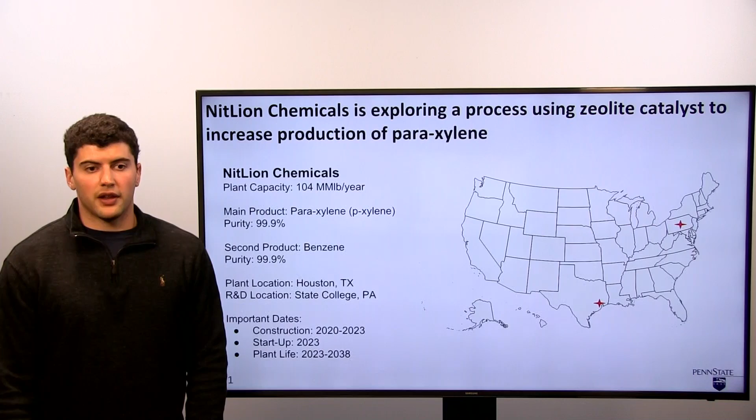The plant life has some important dates to note. Construction will begin in 2020 and last until 2023, with startup occurring in 2023 as well. The total plant life will be 15 years and will end in 2038.

Our process design had to meet a few specification goals in order to be considered successful. For example, p-xylene product purity needed to be 99.9%, benzene product purity the same, and toluene product purity must be 99.5% if we were to sell toluene.

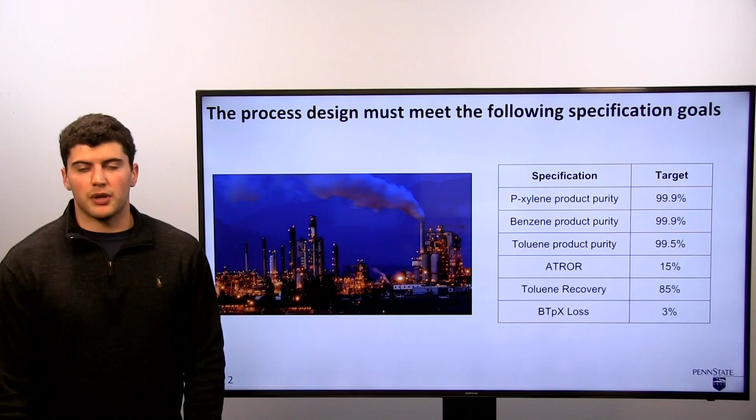Our after-tax rate of return would have to be 15% to be considered a successful plant, while our toluene recovery after the reactor would have to be 85% through the separations. And finally, our benzene, toluene, and paraxylene loss needed to be less than 3% to be considered successful in the eyes of NitLion Chemicals.

Our presentation will focus on three main points. The first is our process design and our equipment design, where we talk about how we went through the process flow and how we designed our equipment to meet the specifications needed.

The second is an economic evaluation with a sensitivity analysis to determine the feasibility economically of our product and our plant in total. And finally, we'll make some recommendations and future work recommendations in order to produce the p-xylene that we need with a feasible outcome.

The process operates in two main phases, synthesis and purification. For our first phase of synthesis, we covered just our reactor, and within our reactor is our main phase, toluene disproportionation, followed by two side reactions: toluene hydrodealkylation and xylene disproportionation.

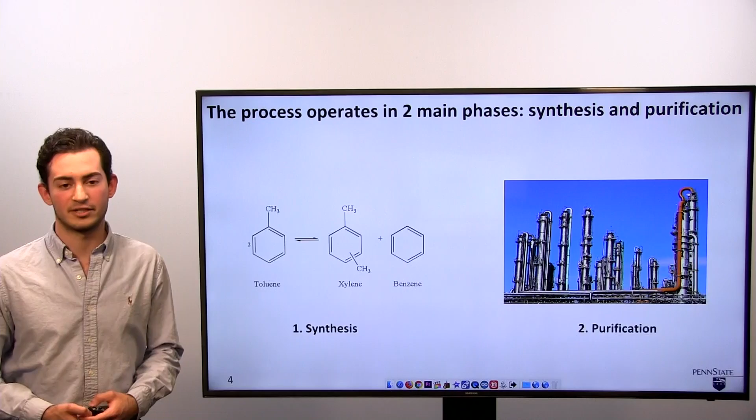Moving on to our second phase, we have our purification, which covers a VLE separator, 3 distillation columns, and a Parex. As you can see, this is our BFD, which we'll expand in just a few seconds.

We have our toluene feedstock combined with our hydrogen feedstock to go into the reactor. From there, we have our products, which will then go into the VLE separator. With the VLE separator, we hope to separate our light gases from the rest of the feed so that we can have better distillation products from our distillation columns.

For our first distillation column, we have benzene leaving the top of the column as a distillate, and it's also equipped as a partial condenser, so we can then vent the light gases out from the top as well, so just in case if we have any residual hydrogen or methane, it can leave our process.

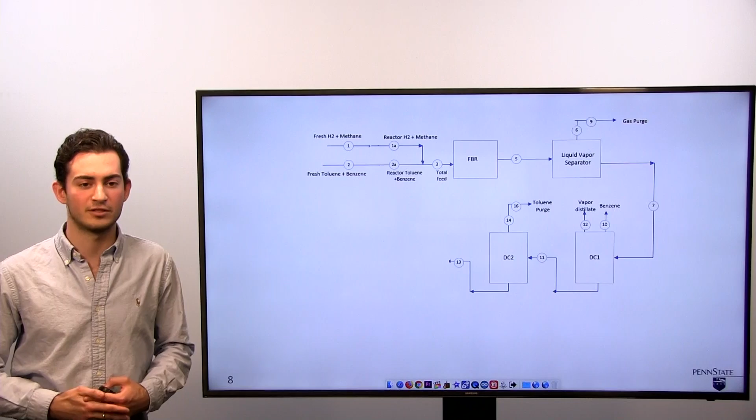That's followed into our toluene distillation column, where we are able to remove 99.9% of our toluene, and then our TMB column, which removes all TMB. That allows us to have an enriched feed into our Parex, where we can then have our purified product.

The reactor utilizes zeolite, a new catalyst, to convert toluene to mixed xylene isomers with high selectivity to p-xylene. What we saw with traditional catalysts is a selectivity of 24% to p-xylene, while our reactor is actually capable of achieving 34%. That is why we decided to use zeolite as a new catalyst.

Our reactor contains 13,000 pounds of catalyst and has a length of 14 feet and a diameter of 5 feet. We have our hydrogen feed combining with our toluene feed in order to reduce coking within the reactor. Then we have our products, which are the mixed xylenes, benzene, TMB, which comes from a side reaction, toluene, hydrogen, and methane, which also comes from a side reaction.

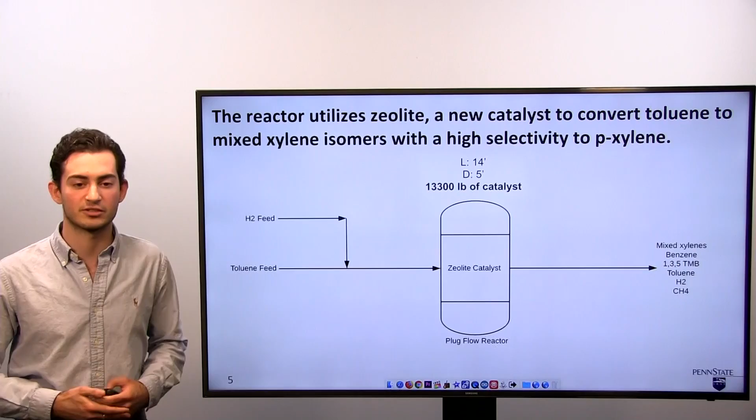Distillation separates the benzene, toluene, and TMB from mixed xylene isomers. The benzene column is equipped with a partial condenser, which removes any residual hydrogen and methane from the process stream. That's followed by the toluene column and then the TMB column. All three columns are under 200 feet, and they also have a diameter of roughly about 10.

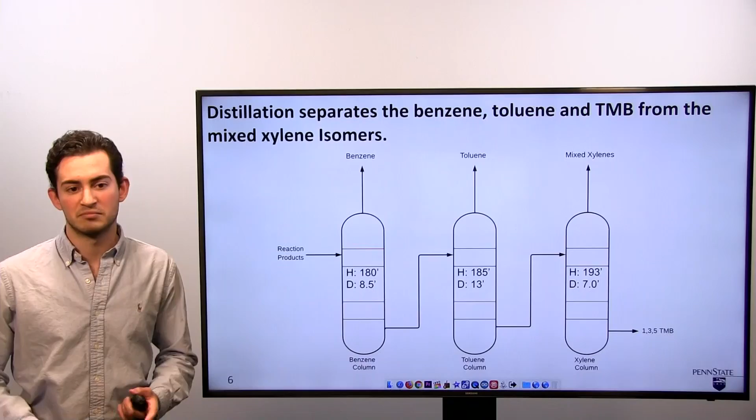The P-xylene is then separated from the O and M xylene isomers using the Parex adsorption unit. The conditions were set by NitLion Chemical at 320 Fahrenheit and 95 psia, in order for the column to work correctly and achieve the correct separation.

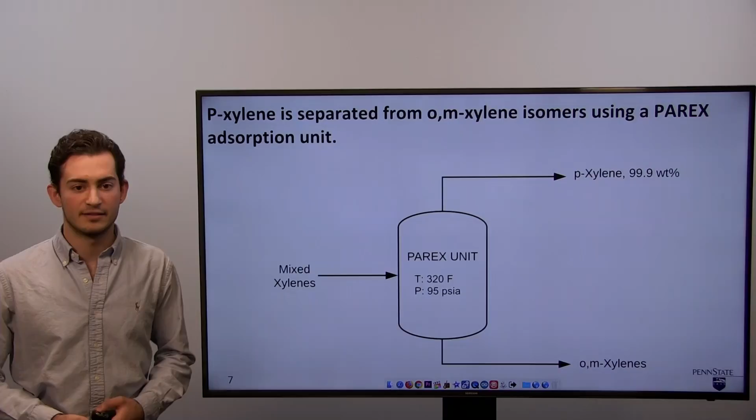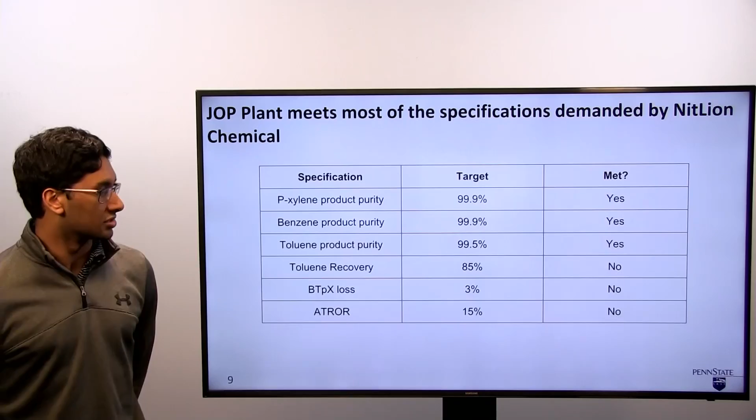The plant uses three types of control schemes to maintain proper process operation: temperature control, level control, and pressure control. The temperature control is used to maintain the temperature of the process stream exiting the heat exchanger, and it varies the flow rate of the utility.

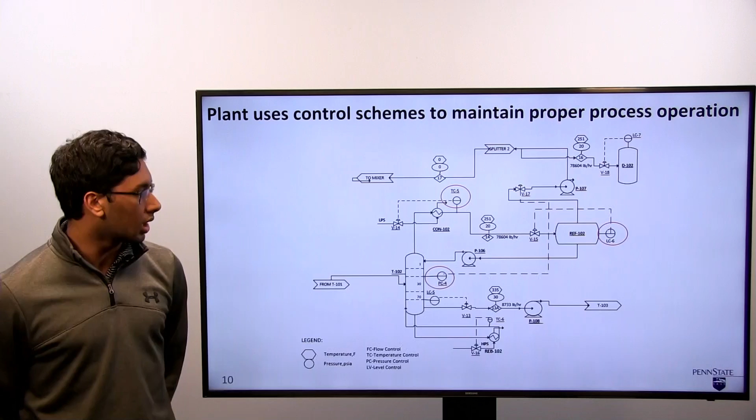The level control maintains the liquid level in the tank. If the liquid level is too high, then the rest of the plant downstream of it will be backlogged. The pressure control maintains the pressure in the column, because if the pressure is too high, that could cause explosions within the column.

In addition to meeting the product purity specs, the plant also meets the safety specifications required by NitLion Chemical. The first one is the benzene safety specification, where the storage tank for benzene is kept far away from a natural river source, which prevents contamination.

The second specification is the hydrogen and methane gas purge. It's kept away from an open flame or anything explosive to prevent explosions. The third one is the TMB flare, which converts TMB into CO2 and hydrogen into water vapor. The ppm of CO2 leaving the flare is kept under 40 ppm.

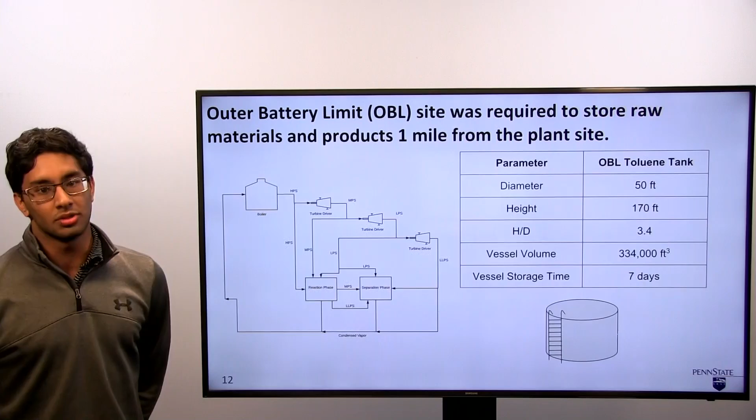There's an OBL site used to store raw materials and products 1 mile from the plant. On the left-hand side of the screen, you can see our steam generation OBL site. We use high-pressure steam, medium-pressure steam, and low-pressure steam to supply utilities to our plant. On the right-hand side is the dimensions of our OBL toluene tank, which has a volume of 334,000 cubic feet, and the storage time is 7 days.

After we analyzed the design of our plant, we looked at the economic viability of building this plant and whether it would turn a profit. Our plant capital is estimated at $165 million, and that includes our IBL and OBL costs.

Currently at market price, we can sell our P-xylene and benzene products for a total of 84.6 cents per pound, and we are also making a net gain of 8.62 cents per pound by selling our steam as well as our TMB as fuel.

We also took a closer look at our IBL capital costs, and we found that the Parex unit takes up a vast majority of this cost at $56 million of our $92 million estimation. So this is the most expensive piece of equipment that we will have to install.

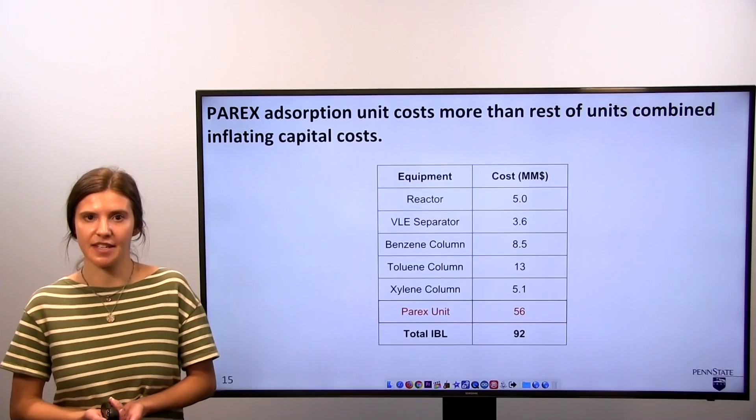In order to be profitable, we need to take a closer look at our raw material costs. We found that 85.2% of our cost is our toluene feed, which comes out to about $2 of toluene per pound of product we make. Since we're selling our product at 84.6 cents per pound, this is not viable.

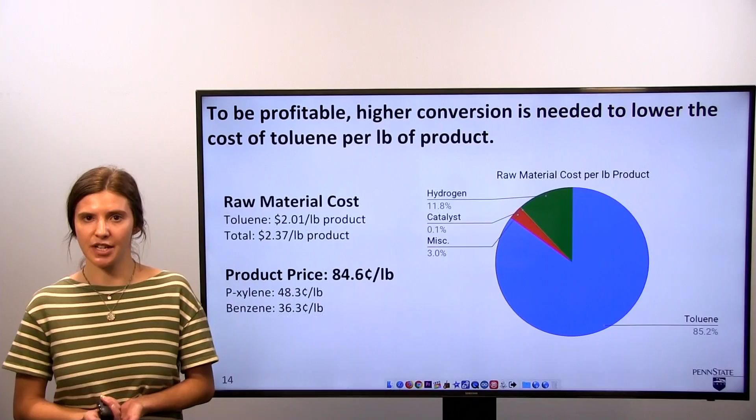So in order to decrease the amount of toluene that we use per pound, we need to make a higher conversion of our product and make more P-xylene.

Finally, we looked at the cash flow, and we found it to become increasingly negative for each year of operation. Our net present value over 12 years was negative $846 million, which is a very large amount. We want to be making money and not losing money.

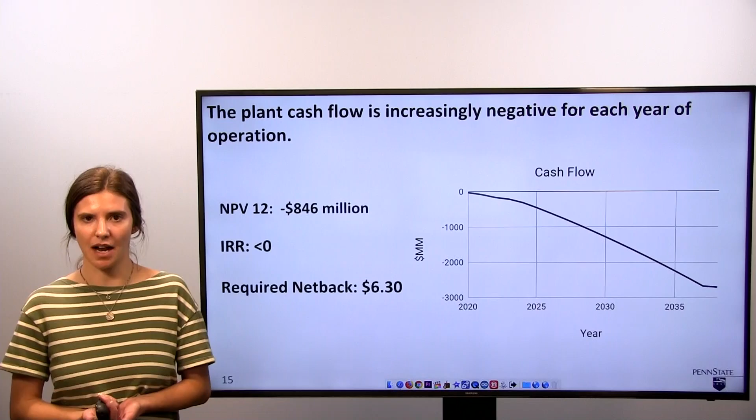We didn't have an internal rate of return, so we did not meet our 15% ATROR as specified by NitLion Chemical. In order to meet 15%, we would have to be selling our product at $6.30, which is much higher than market value today.

The third option is by varying the price of raw material, which is toluene. From the graph, if we increase the price of toluene, the cash flow will decrease. Again, this option is not feasible, as the price of toluene might increase in the future.

The fourth one is by delaying the start-up year. Delaying the start-up year until 2027 will increase the cash flow. However, after 2027, the cash flow will decrease. So it can be concluded that this option is not feasible. All these four studies have been conducted at the current product price, which is around 84 cents per pound.

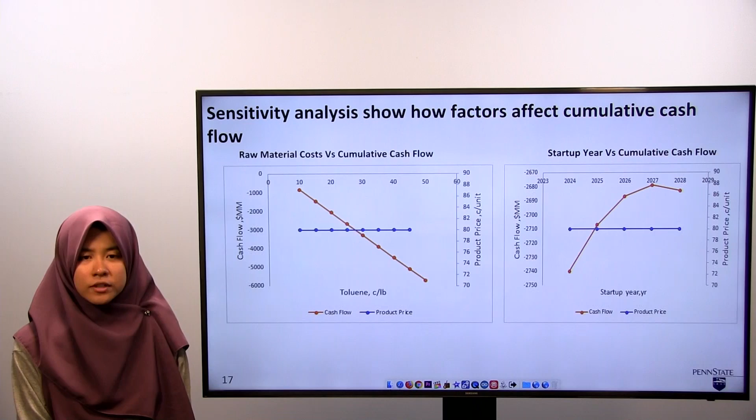In order to make this plant profitable, the product price needs to be increased.

PDRI is a tool to measure project scope of completeness. A total of 3 PDRI analyses have been conducted throughout the lifetime of the project. The first PDRI had a score of around 800, which decreased to a score of 750, and in the final PDRI has a score of around 700.

Even though the PDRI score is higher than the typical score of 200, the decrease in PDRI score across all three stages shows an improvement in project definition. A score of below 200 is not reasonable for this project because many elements are not being considered, such as permitting, social issues, and site environment.

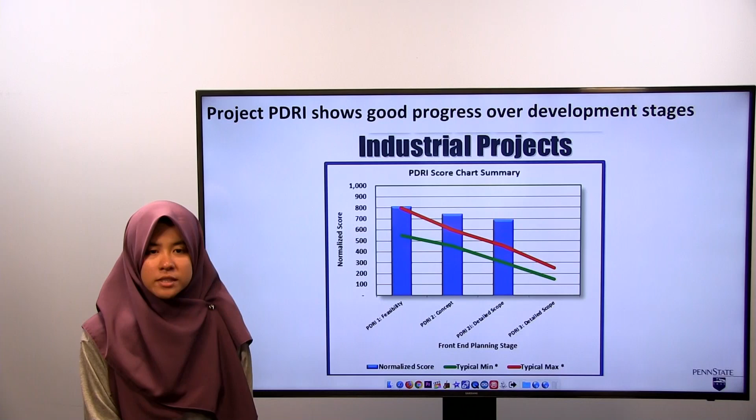Alternative design has been decided by adding a compressor and partially recycling the toluene and hydrogen. This design has met similar specification to the base case in terms of product purity of p-xylene and benzene. However, the project total for the alternate design is slightly higher than the base case. This is because we are adding the compressor.

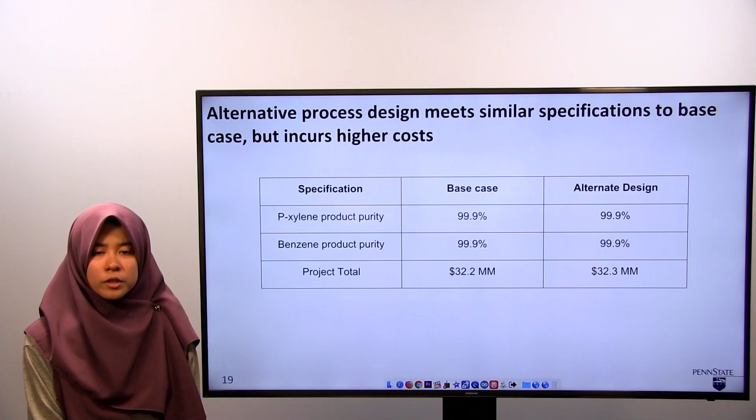So therefore, this alternate design is not able to overcome the deficit of this plant. It can be concluded not to perform this alternate design.

JLP Inc. does not recommend any further implementation of this p-xylene plant to Nitline Chemicals at this time due to the extreme financial losses over time. Our negative $846 million cash flow or net present value represents too large of a deficit to come back from for this plant. A few changes could be made to increase the profit of this plant.

For example, the Parex purification unit is incurring most of the capital costs. If we looked into cheaper purification methods, it could decrease the capital cost greatly.

Second, we use a lot of steam in the plant, and the steam is very expensive in terms of utilities. We could also look into using the process stream instead of steam to heat or cool other parts of the process stream in heat exchanger loops.

Finally, the TMB may be purified until it's 99.9% pure and sold as a product, as it has a fairly high market value.

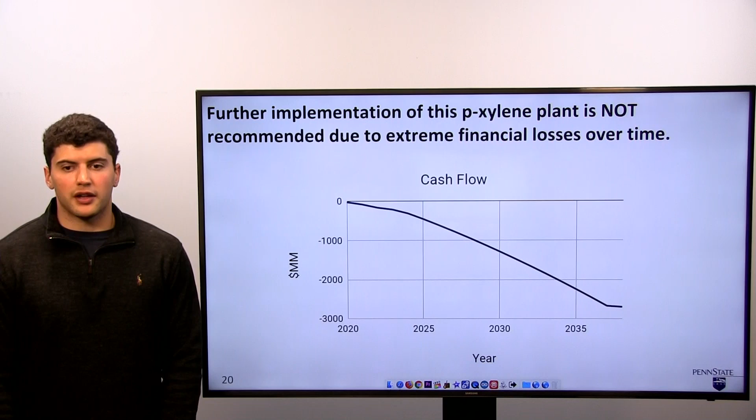Any of these three recommendations could be studied and could possibly create a positive cash flow over time, but the most likely is changing the Parex capital cost and/or the utilities. Thank you.